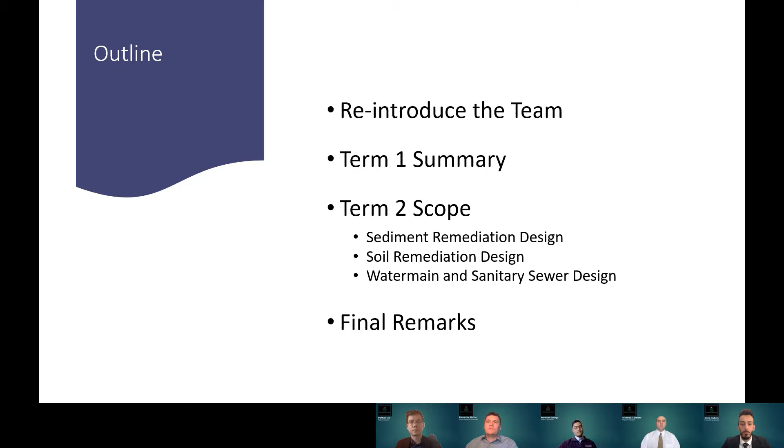This is the outline for our Term 1 summary. In Term 1, the team completed preliminary assessment for sediment remediation, with the main objective being the design of a treatment system for contaminated sediments on Villiers Island, and ultimately prepare the site for further development. The team also focused on soil remediation, in which the main objective was the remediation of the contaminated soil at Cherry Street South Bridge location to prepare the site for construction and reduce environmental impacts on the project.

Furthermore, the water mains and sewer mains design were also evaluated in the preliminary phase, in which NCI's primary goal is to provide the island with water and sanitary services that would accommodate the needs and requirements of the residents and communities. NCI was also responsible for the preliminary assessment and design for the Cherry Street South Bridge that was proposed to connect the island with the mainland.

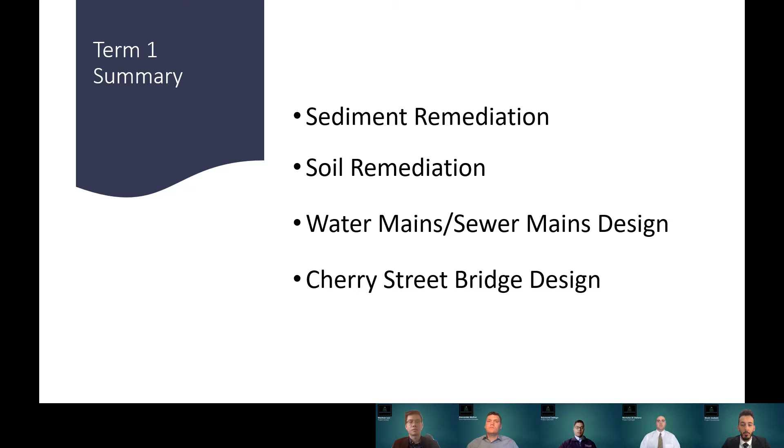My colleague Munir will now further elaborate on highlights of the Cherry Street South Bridge design and their significance towards the project. Thank you, Nicholas.

In the primary phase of the design of the Cherry Street Bridge, the primary objective of the design was to accommodate the transportation needs and requirements for Villiers Island that would meet the design requirements for flood control and aesthetic appeal for the Port Lands Naturalization Project.

Based on the analysis of 3 different alternatives, NCI was able to provide a bridge design that we believe would satisfy the transportation requirements outlined through the scope of the project. The alternative selected would consist of a beam bridge with 3 spans, the outer spans being 35 meters long and the middle spans being 50 meters long as shown in the figure.

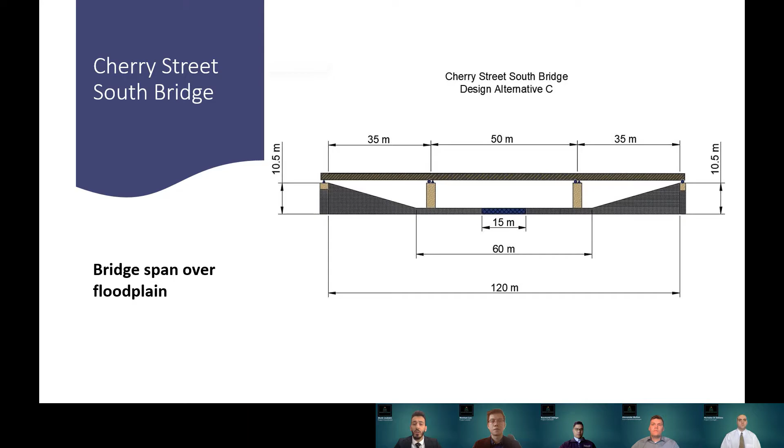Furthermore, the bridge itself would accommodate a pedestrian walkway along with a dedicated cycle path on both driving directions. The bridge will also accommodate 2-way traffic that is designed for bus route accessibility, all of which was accomplished using a pre-stressed concrete girder design similar to that shown in the figure to the right.

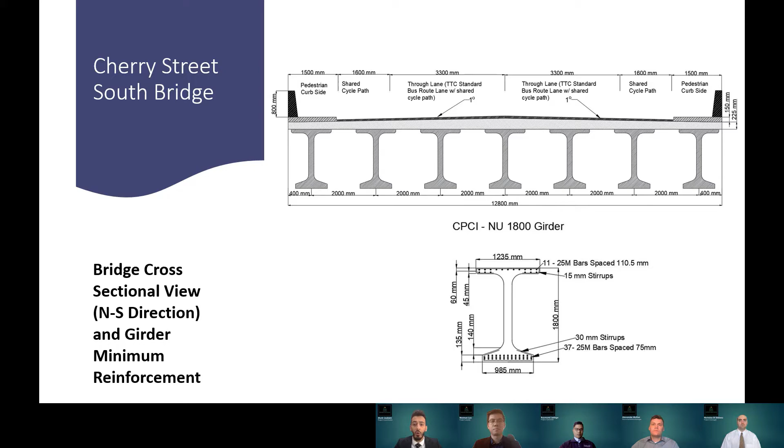From the analysis completed on the bridge design and the information obtained during the preliminary research, NCI was able to relate some of the findings to the continued work in the second phase of the project, in which the grading and the elevation map obtained for the bridge design will further be used for the design of the water main and the sewer network, along with having a better understanding of the connection points of existing water service infrastructures on Cherry Street and the mainland that meets the bridge.

The bridge design also assisted in understanding the soil remediation requirements for the second phase of the design, in which the footing and the foundation of the bridge would influence the volume of the soil to be remediated. This information was therefore used to assist in the continuation of work in the second phase of the design.

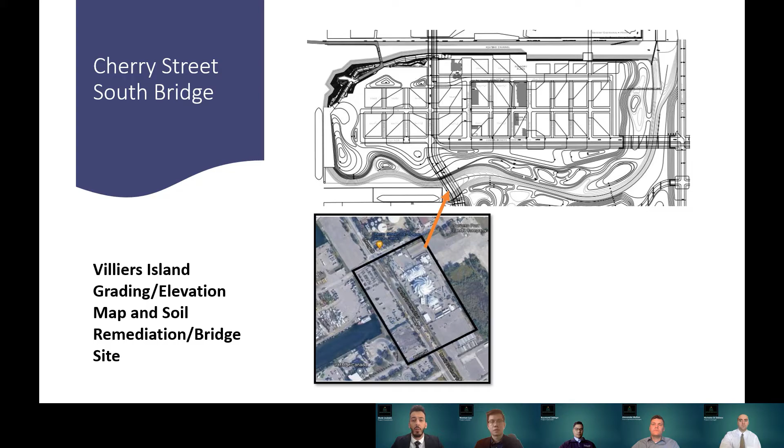Nicholas will now discuss the elements of the second phase and the work completed towards sediment remediation at Villiers Island. Thank you, Munir. In Term 2, after thoroughly assessing all the feasible options, we completed detailed designs for sediment and soil remediation and water and sewer mains, while including heat recovery technology.

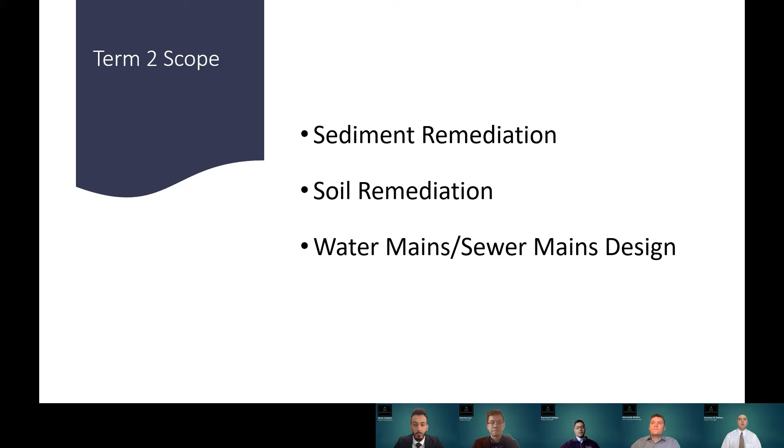Annually, the Don River dumps 30,000 cubic meters of contaminated sediment into the Keating Channel, which must be dredged to prevent flooding in surrounding areas. We were entrusted to find a sustainable method to manage the sediment. We decided on 2 remediation options.

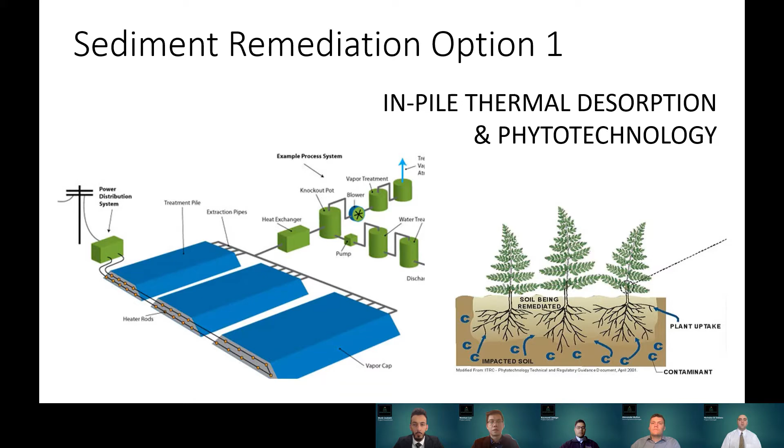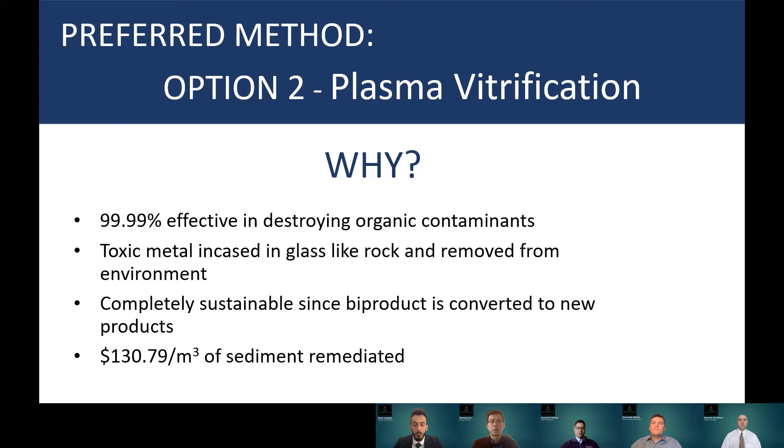One was in-pile thermal desorption with phytotechnology, and the other was plasma vitrification technology. All considered, we decided on plasma vitrification since it destroys organic contaminants while encasing toxic metals in a glass-like rock. It is the most sustainable choice since the waste is converted into new products such as shingles, road aggregate, and even floor tile. The process is very affordable at $130 per cubic meter of sediment remediated. We had to locate a suitable site and design a remediation facility that could manage the volume of sediment.

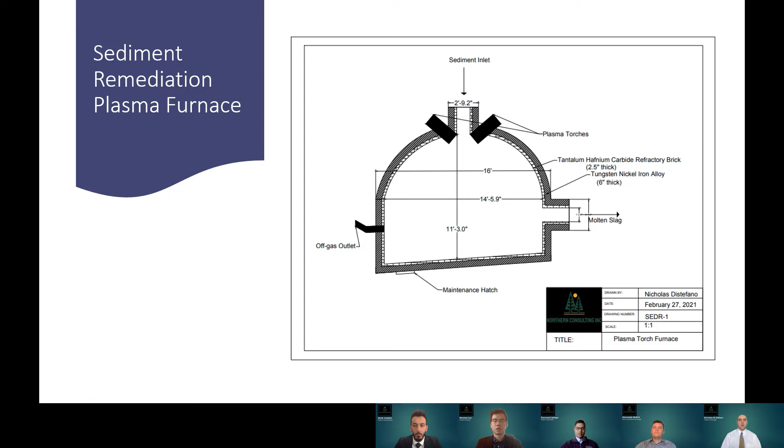First, we designed the plasma furnace. Reaching temperatures up to 4,000 degrees Celsius, the furnace had to be designed with an outer skin strong enough to contain the molten slag and withstand the high temperatures. We chose a tungsten nickel iron alloy outer skin with a lining of tantalum hafnium carbide refractory brick.

The proposed site is at 2095 Codlin Crescent at Highway 407 and 427. The site consists of 4 large exterior concrete bins, able to store half the dredged annual sediment. Dump trucks enter the yard at Albion Road and dump their sediments in the bins.

The sediment is then loaded into the hopper located at the rear of the building, which is connected to a vacuum tube that transports the sediment to the second level of the facility.

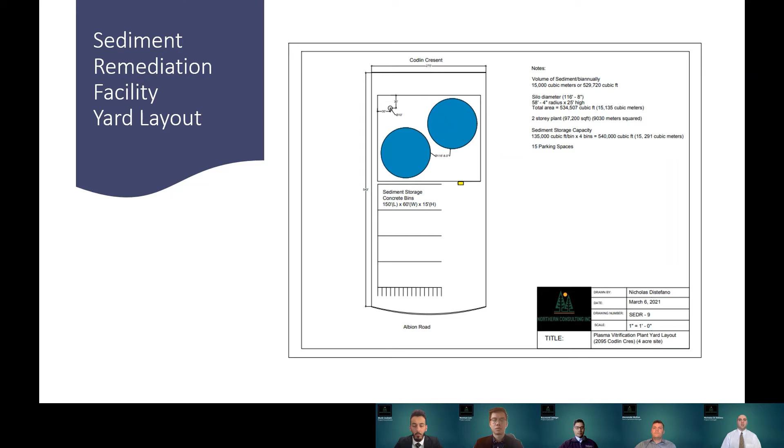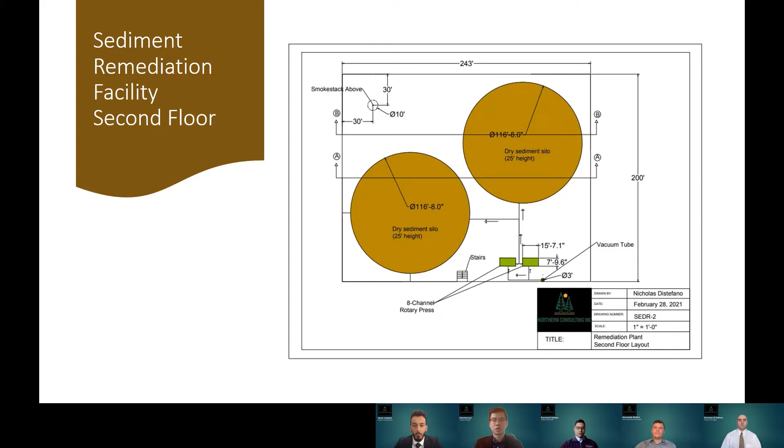The sediment is fed onto one of 2 rotary dewatering presses that reduce the sediment volume to be treated by approximately 50%. The sediment is then sent to one of two storage silos, where it is gravitationally fed into the plasma furnaces. For safety, the furnaces are contained in a sunken area in the event the outer skin is breached.

The molten slag travels in pipes within the concrete floor to the crusher, where it is quenched with jets of water and crushed. The crushed slag is dropped into the disposal bins, waiting to be hauled away and sold.

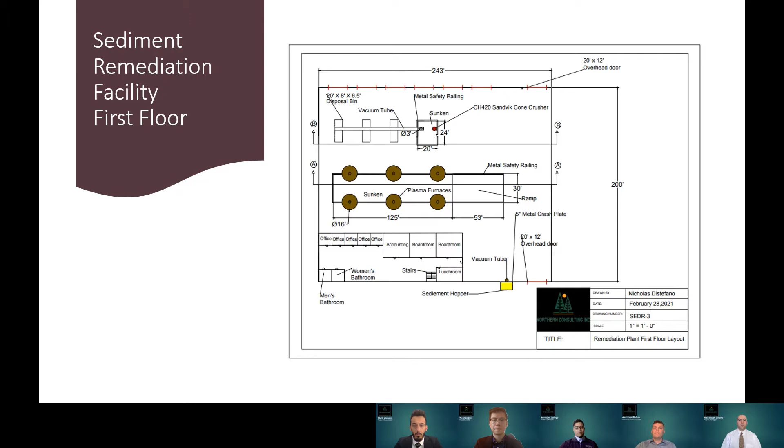Thank you, Nicholas. Now for soil remediation, Northern Consulting was tasked with performing a Phase 1 site assessment and reviewing Phase 2 site assessment work at the Cherry Street South Bridge site. This review allowed Northern Consulting to determine the soil volume of approximately 450,000 cubic meters being contaminated with petroleum hydrocarbons, polychlorinated biphenyls, inorganics, metals, volatile organic chemicals, and polycyclic aromatic hydrocarbons, all needing removal from the site before bridge construction can begin.

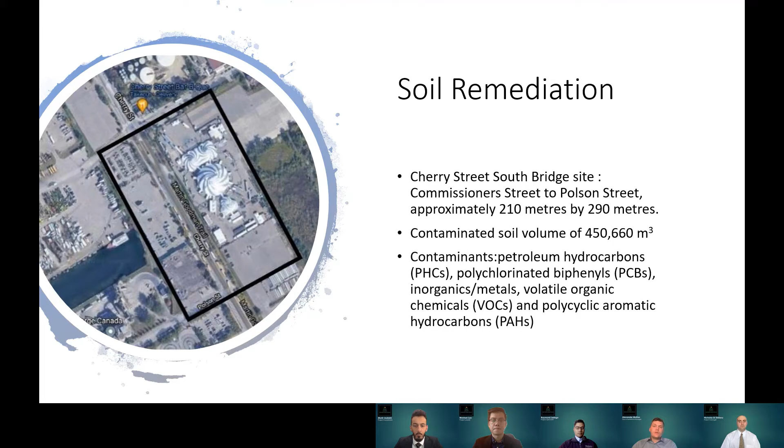Once the contaminants and their concentrations were determined, Northern Consulting Inc. was able to determine 3 design alternatives that could be applied to the site. These alternatives included excavation and landfilling, off-site soil washing and bioremediation, and finally, a soil recycling facility on the Portlands.

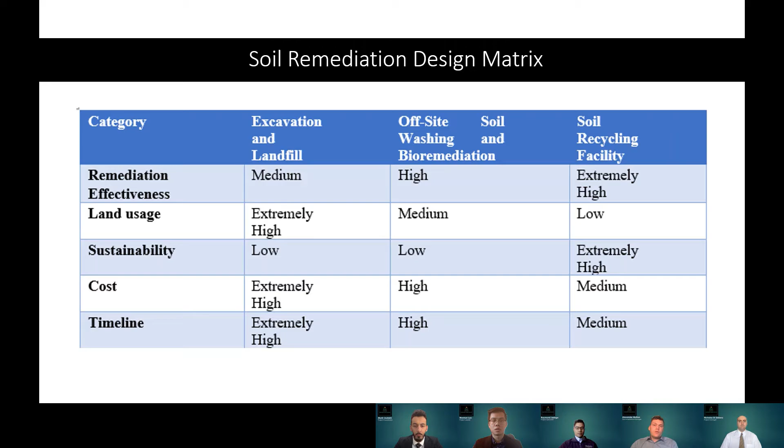With the soil recycling facility on the Portlands having low greenhouse gas emissions due to minimal equipment travel, as well as reusability of recycled soils, this alternative is the best design, providing the most effective and sustainable solution for the client. The soil recycling facility will operate with a soil washing process combined with thermal desorption and bioremediation.

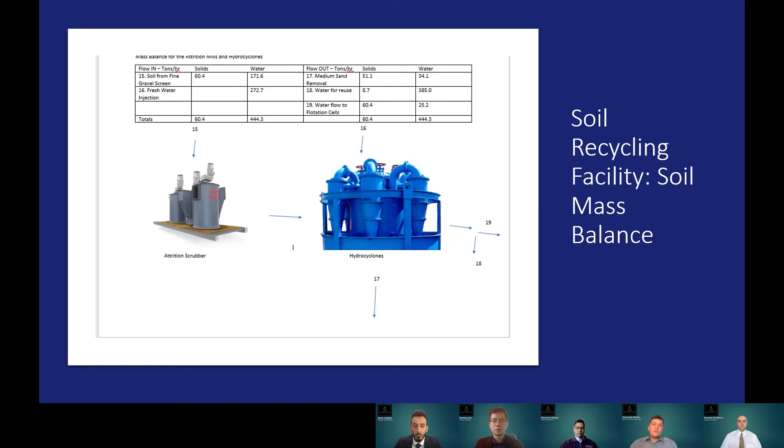To determine the amount of soil processed through the soil washing phase, NCI has developed a soil mass balance for the different equipment throughout the process. This is shown in the example on the slide, where on the left we have the inflow of both soil and water for the equipment shown, and on the right we have the outflow from the process of both soil and water.

Ultimately, from the soil mass balance, we are able to determine 10% of the original soil will be transferred to the soil pile, which NCI has created a design for.

Now I'll pass it to Wenhan to talk about water main work for the project.

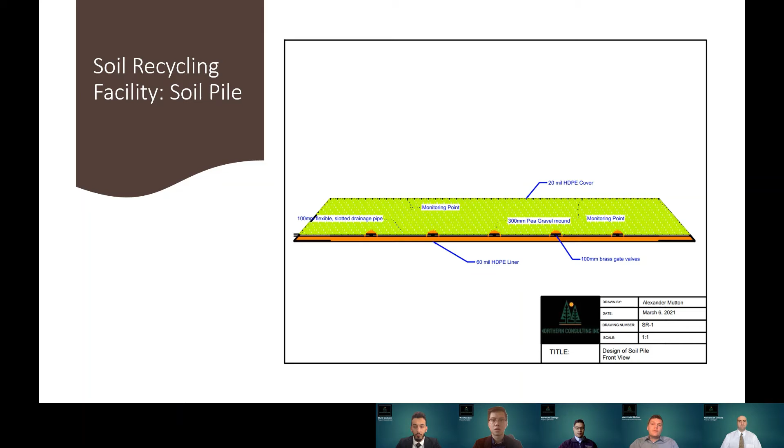Thank you, Alex. NCI was also tasked to design a water distribution system on Villiers Island that can deliver potable water for domestic consumption while having sufficient capacity at all times, so that we can deliver adequate quantities of water at adequate pressures for firefighting purposes if necessary.

In our term 1 work for the water mains, we first determined the water demand. NCI sectioned off Villiers Island into blocks of different land uses such as institutional, community centers, residential, and commercial buildings. From that collected data, using population and total floor space, we were able to come up with the water demands of liters per day on Villiers Island.

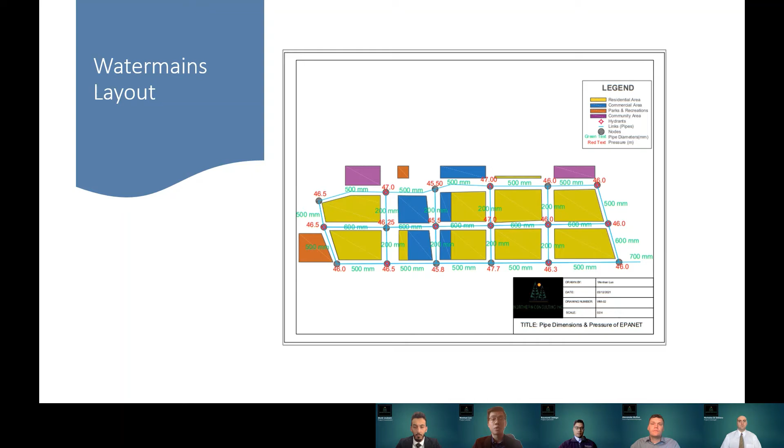Also from term 1, NCI was able to produce a basic working water main layout, which was then worked upon through term 2. From the term 1 data, we were able to come up with the water demand pattern for each block to determine the peak hours of water demand, ensuring our water main system can handle these scenarios. As water demands aren't always the same throughout the day, it's important to account for these demands as they go up and down during lunch hours or evenings through 6 to 8 p.m., when residents consume the most water.

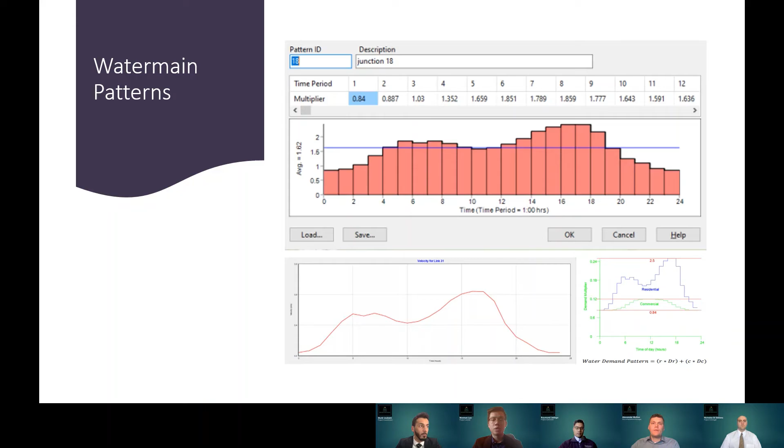With the help of data from the 2019 Toronto Sewer and Water Main Manual, we were able to come up with an accurate representation of these water patterns for mostly commercial and residential areas. These were then implemented into EPANet, which I will talk about later. For now, I'm going to talk about the fire hydrants that were also implemented into the system.

The number of hydrants were spaced and determined through the guidelines, and the fire flows were calculated for each block on the island. This tells us how much water the system must distribute to a certain area if a fire were to occur.

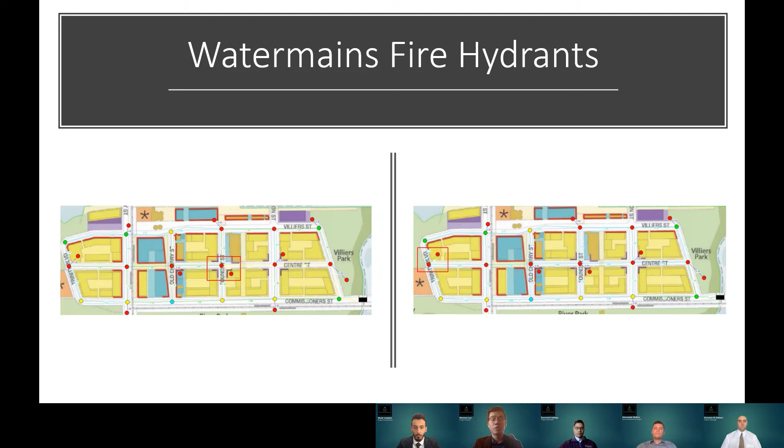Seen on the right is another scenario, where the hydrant was the furthest away from the source of water, showing that our system can properly distribute high amounts of water to the furthest point from the source. This was also successful when running the simulation, proving that our system was successful in the implementation of hydrants.

To test all these scenarios and water pressures, NCI used a tool called EPANet, which helped us lay out a water main network with features that helped determine if our network would be stable through daily water demands. We were able to input variables such as elevation, pipe sizes, roughness, and friction factors, which helped us get a closer look at a real-life simulation.

Through our simulation and tests, NCI can confidently say that a fully optimized water main system for Villiers Island was produced, following the Toronto guidelines and standards, with a system that can sustain water demands at peak hours with or without fire hydrants. Now I'm going to pass it on to Raymond, who will be talking about the sewer network design.

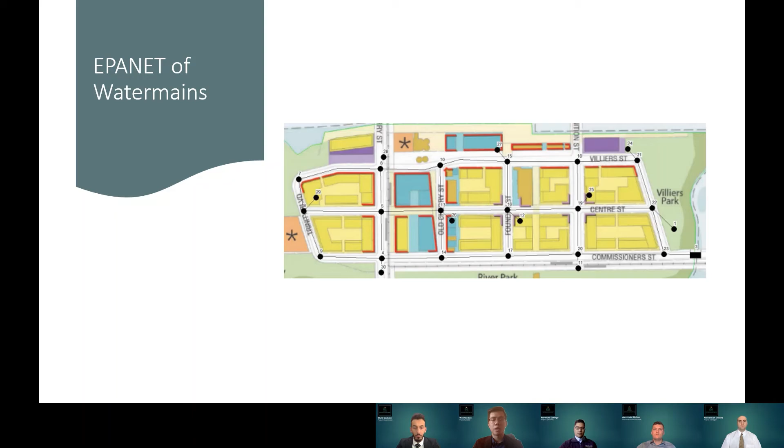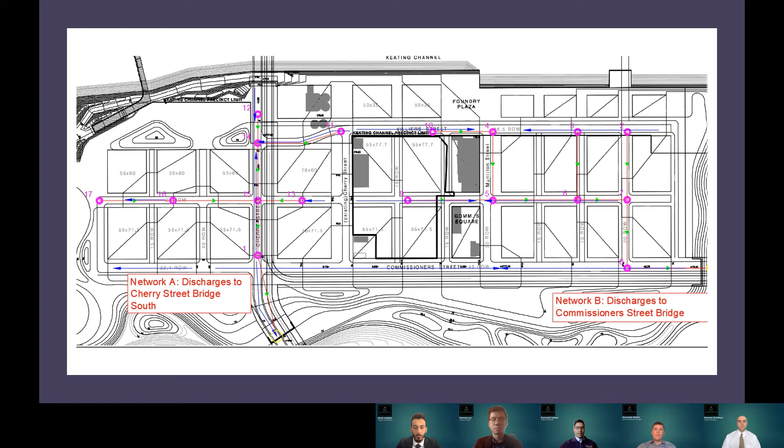Thank you, Wenhan. In this section, I will be explaining the methodology of sizing pipes and making a comparison between alternative designs. To give you a closer look, this is the sewer alignment, with the background being a scaled grading plan and blue arrows representing the direction in which the ground slopes.

To size pipes, the following inputs are used: Manning's coefficient, wastewater flows to each manhole estimated in term 1 based on projected population densities, pipe lengths, and the assumed pipe diameters and slopes.

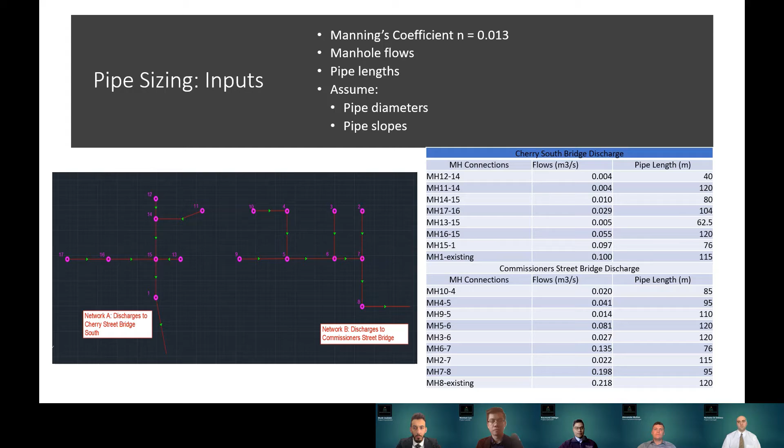The City of Toronto allows pipe flow velocities to be within 0.6 and 3 meters per second, but our design aims to minimize velocity to reduce pipe material degradation over time. All pipes will be designed to flow at 80% full, with adherence to design guidelines to minimize pipe slopes by maximizing the hydraulic radius of each pipe.

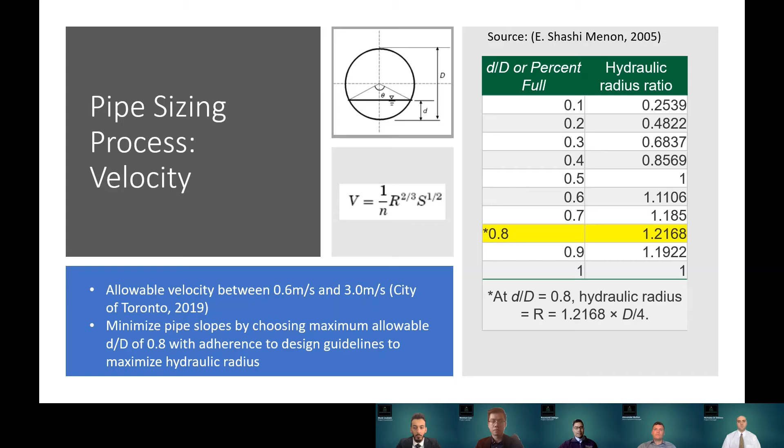The process of sizing pipes is iterative. After meeting flow velocity requirements, the flow capacity of the pipe is calculated and compared with the flow received by the manhole where the beginning of the pipe is connected.

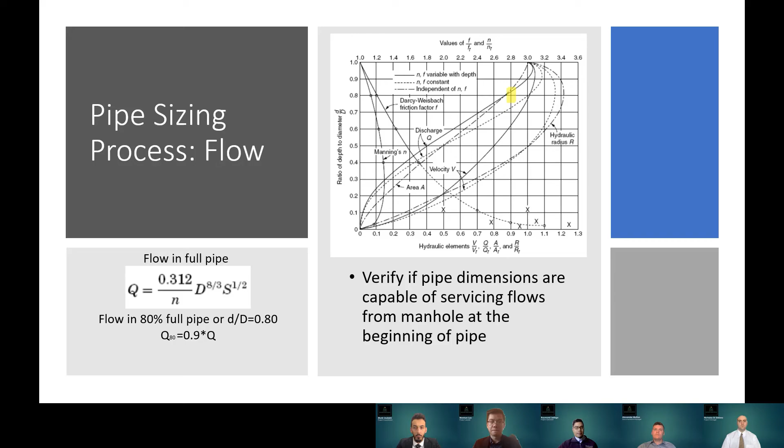If the flow capacity is less than the flow received by the manhole, either the pipe diameter or pipe slope will be increased, which also increases the pipe velocity serving flows from the manhole.

As an example, pipe slopes have to be at 1% for the initial branches of a sewer network and 2% for pipe lengths equal to or less than 40 meters.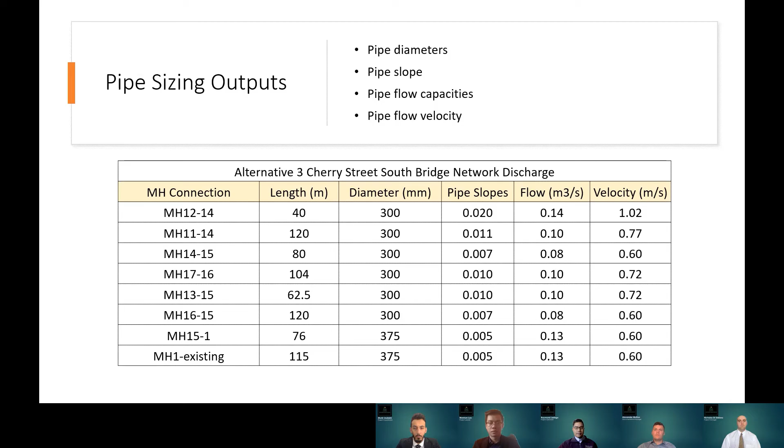In total, we have explored 12 sewer design alternatives, but we will be closely looking into alternatives 3 and 4. A quick note is that all pipes used are concrete except for the 254 millimeter pipe, which are made of PVC.

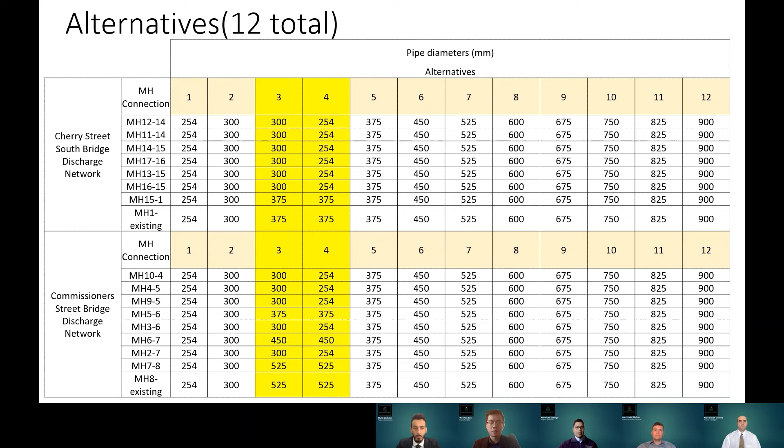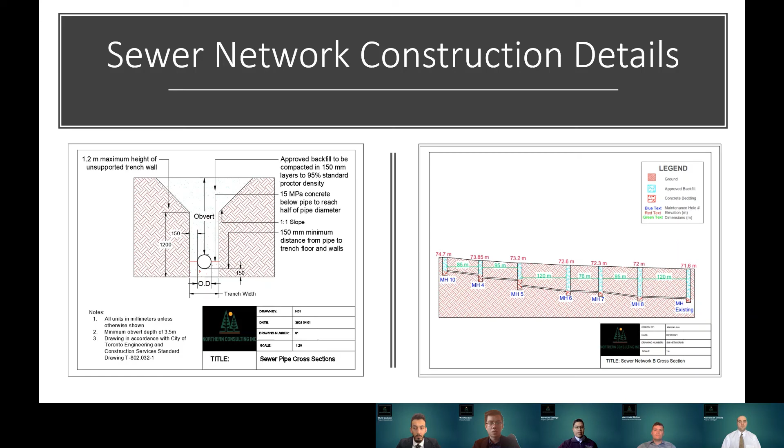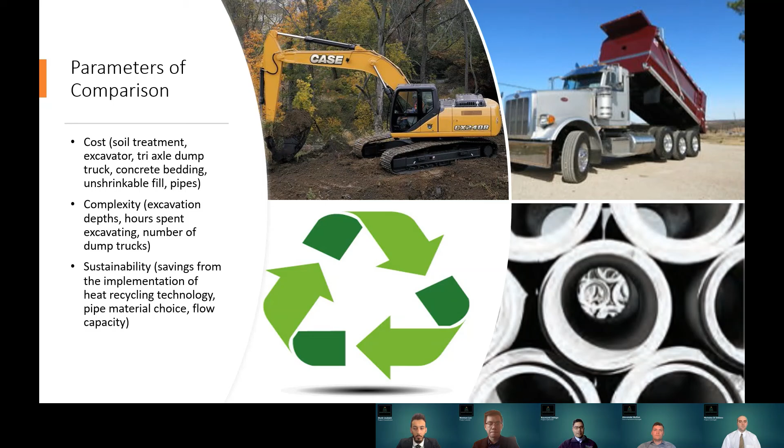To choose a final design, cost, complexity, and sustainability will be the parameters of comparison. Based on a decision matrix, we have decided to select alternative 3 above all others, though alternative 4 comes closely behind in second place.

I'll now hand it off to Munir to discuss the heat recycling technology implemented in our design. Thank you, Raymond. At NCI, we strive for sustainability in our design and innovation in our engineering work.

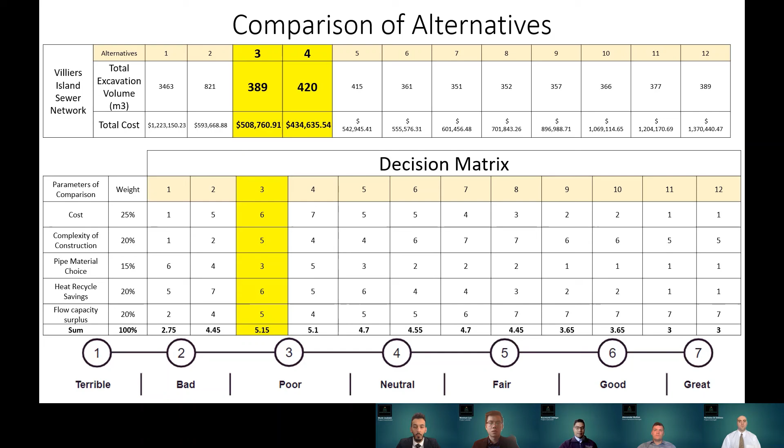Hence, we have undertaken efforts to implement a heat recycling system as part of our design to the sewer network for the district of Villiers Island.

A heat recycling system allows for the recovery and potential savings of energy in the form of heat. Heat is continuously lost in wastewater that is discharged from buildings and residential units that have used energy to heat the water for personal and household related use.

With the implementation of a heat recycling system, we aim to capture the wasted heat and return that energy to the district for various uses, such as water and space heating.

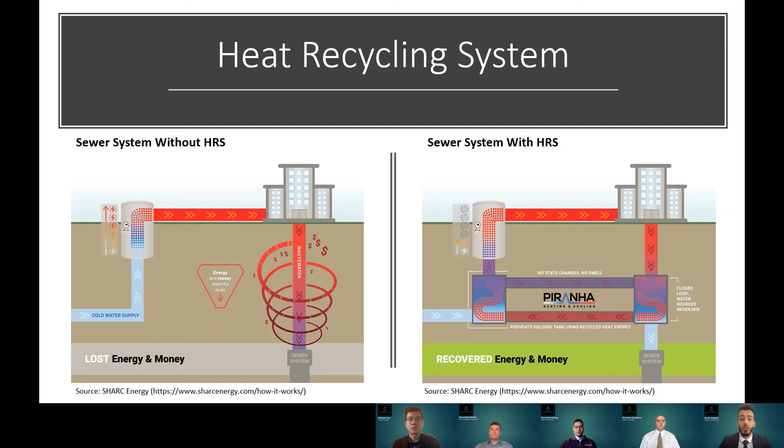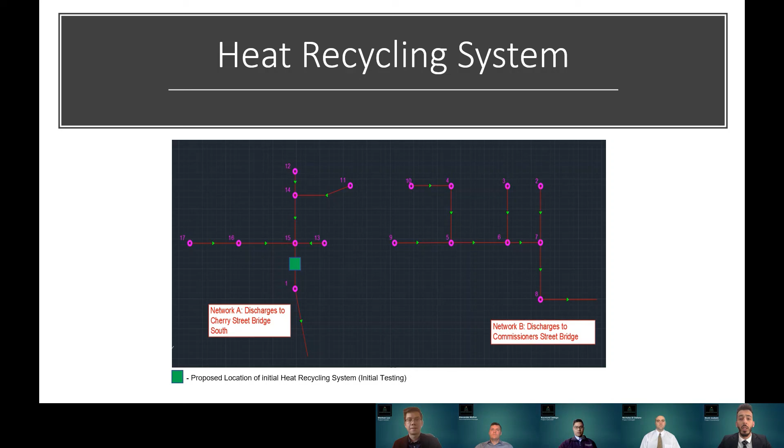To assess the feasibility of the design, we perform a preliminary assessment of the sewer network and the potential energy recovery of the system. The heat recycling system was proposed on sewer network A at the discharge point of the sewer network at Cherry Street Bridge, as shown in the figure below.

The following are the results obtained for the analysis of alternative number 3 and alternative number 4. The primary differences between both alternatives are based on the choice of pipe material and pipe dimensions, in which alternative number 3 is designed with concrete piping at an average inside diameter of 300 millimeters throughout the entire network.

Alternative number 4 is designed with PVC piping at an average inside diameter of 254 millimeters.

Based on these differences, the potential energy recovery of each alternative varies, however, only slightly. The difference in the energy recovery is based on the heat losses that occur during the transportation of the wastewater in the piping system, which is primarily influenced by the material of choice and the sizing.

Based on this information, the energy recovery of alternative number 3 was found to be 450,000 kilowatt hours per year, with a potential cost recovery of $55,000 per year, whereas alternative number 4 was found to have an energy recovery...

of 420,000 kilowatt hours per year with a potential cost recovery of $53,000 per year.

Therefore, NCI concluded that the heat recovery system would be feasible for both alternatives and material choices, with concrete piping material having a potentially better rate of recovery.